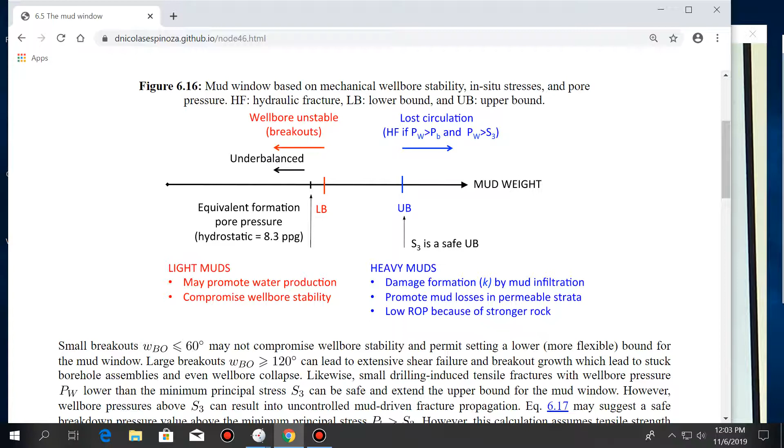So the last thing we talk about, let me bring my notes here, which are a little more organized than what I wrote, was how to define the mud window based on failure around the wellbore, either by shear when your pressure or mud weight is too low, or by a tensile fracture whenever the mud weight and mud pressure are too high.

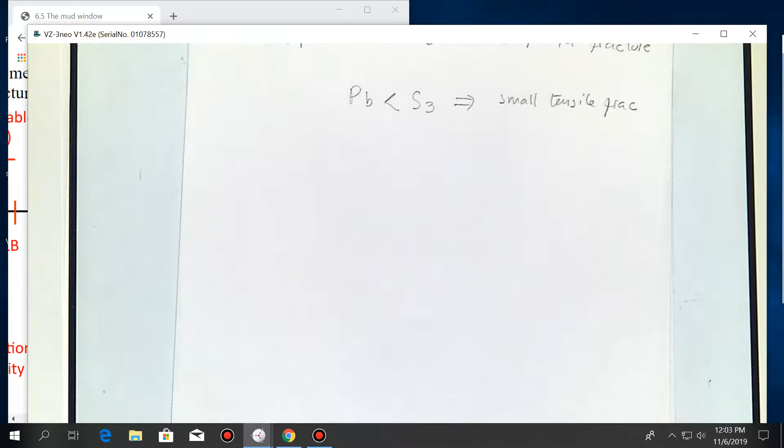The last thing we discussed was what would be the absolute maximum upper bound, or the safest upper bound, whenever you have a situation in which your calculated breakdown pressure is either smaller or larger than the minimum principal stress. I said this already last class, but very quickly, and it's very important, so I'd like to just complete this and then we'll move on.

Whenever you calculate a value of breakdown pressure which is higher than the minimum principal stress, let me move this down because we'll need this space. I'm just moving this thing down over here. And I have my eraser today, so I can erase this.

So whenever you calculate Pb larger than S3, and eventually your pressure in the wellbore gets larger than Pb, the result is that because Pw, the pressure in the wellbore, is larger than Pb, and Pb was already larger than the minimum principal stress, this is going to lead, if this is a wellbore, to a small hydraulic fracture that, as long as the pressure in the wellbore is larger than the fracturing pressure, will propagate into a large hydraulic fracture. We'll see later what the actual pressure is that you need to propagate that fracture. But if the pressure in the wellbore is larger than the minimum principal stress, there's already a chance that this fracture may propagate, and might propagate quite far away.

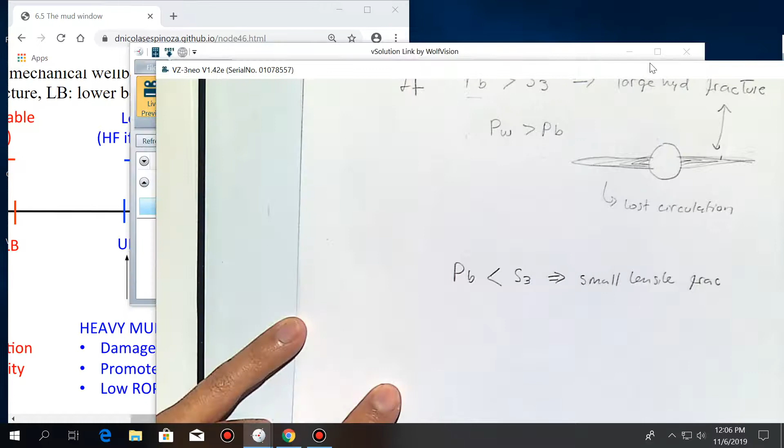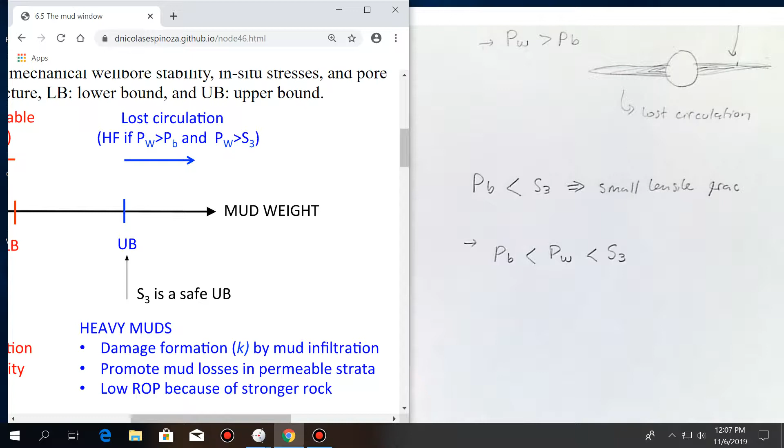However, there is a second case in which your calculated breakdown pressure is going to be smaller than the minimum principal stress. If you get the wellbore pressure to be higher than the breakdown pressure, you should have a small tensile fracture, as long as that wellbore pressure is also smaller than the minimum principal stress. Again, if you go over the minimum principal stress, you could have this large hydraulic fracture, but as long as you are in between these two bounds, for sure you will not have a large hydraulic fracture, and it will just be a short tensile fracture.

And the wellbore is going to be still stable. You're not going to have any lost circulation in that case because that's a very tiny frac. Why is it relatively small? It's because the change of stress around the wellbore, if you remember from the Kirsch equations, does not go very far away from the wellbore.

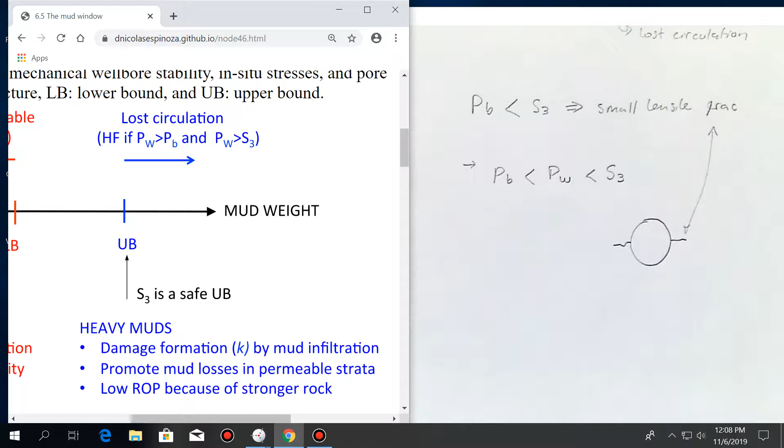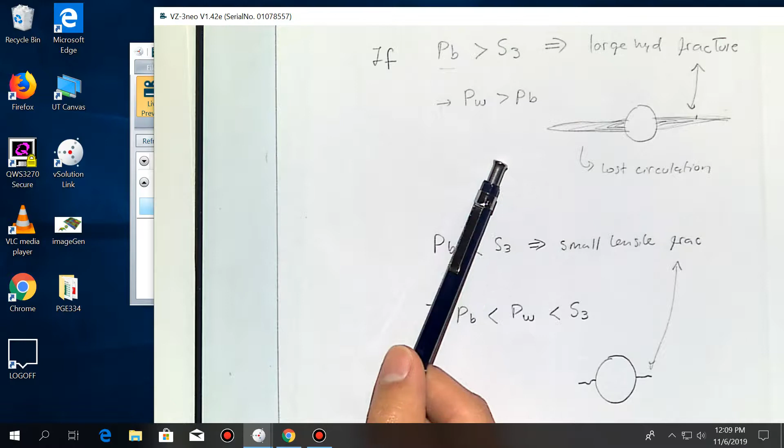So I wanted to clarify that because depending on which situation you are in, your upper bound of the maximum pressure of the wellbore could be either the minimum principal stress in this case, or in this case could be, well, if PW is larger than Pb, in this case could be Pb, and in this case could be directly the minimum principal stress.

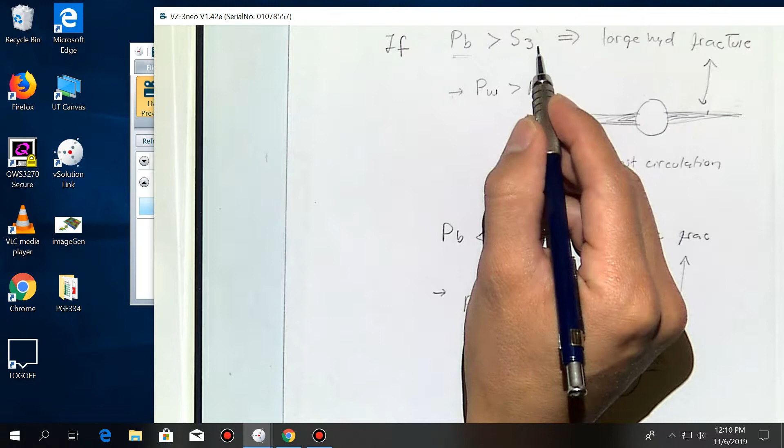As long as you don't go above the minimum principal stress, that's fine. So here you don't need to stop exactly at Pb, you can go a little bit further. But in this one, no, because if you go further, you might have lost circulation. Sometimes you could even play it safer and always set your maximum pressure as the minimum principal stress. The problem with that is that sometimes you may narrow too much, unnecessarily, what your mud window is.

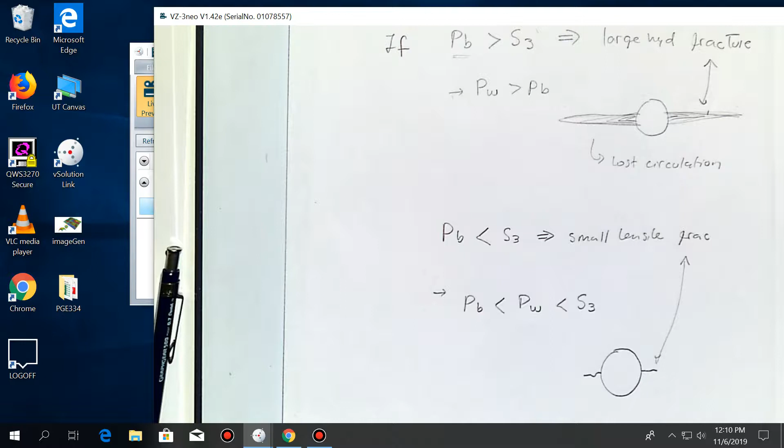All right, so with this we finish the part on vertical wellbores and the basic mechanics of wellbores, and what kind of failures you're going to have around a vertical wellbore. All the equations that we have seen, with some slight modifications, are going to work also for deviated wellbores, and particularly the equations are almost exactly the same for horizontal wellbores, whenever the vertical stress is a principal stress.

But let's talk now about deviated wellbores and how we learn. Particularly, first we'll talk about horizontal wellbores, and then we'll talk about truly deviated wellbores, in which they may not be horizontal. We'll start with an example, just to see and realize that this is exactly the same thing as what we have been seeing before.

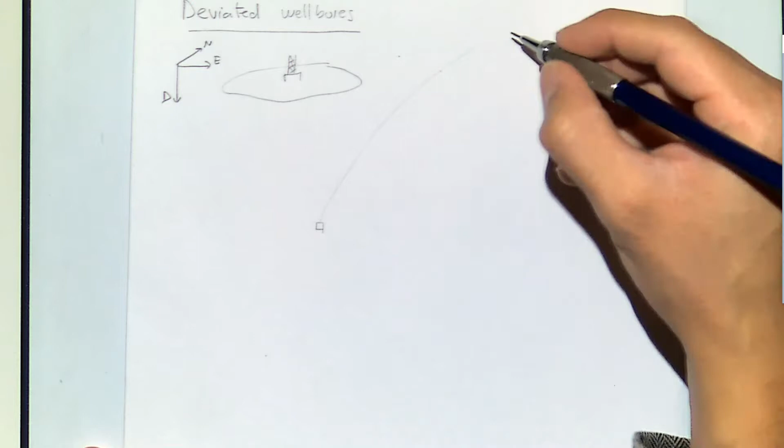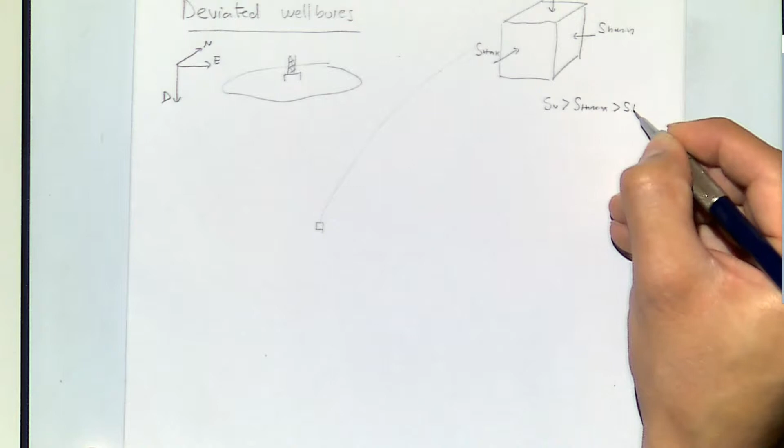Let's consider that we have a drilling pad somewhere over here, and we're going to drill horizontal wellbores. Let me add here a coordinate system. I'm going to also assume that at some location over here where we want to drill and extend our horizontal wellbores, we're going to have a state of stress which looks like this. And it's going to be normal, and this is going to be the orientation of stresses, where SV is larger than SH max, and this one is larger than SH min.

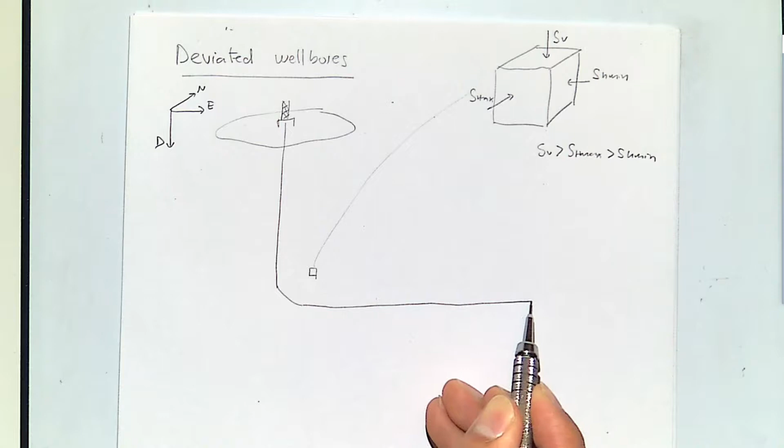Question number 1: in which direction would you drill a wellbore for multi-stage hydraulic fracturing? East direction, east or west, any direction is going to be fine. So let's drill the vertical part, and then we'll get to, let's say, the payzone somewhere over here. It deviates in this direction. Okay, I agree with that.

Let's take a look first at the vertical section. So the vertical section, somewhere around here, position number 1 — if I look at wellbore stability at this location, I should look at the wellbore which is vertical, and I'm interested in the plane perpendicular to the wellbore. So plane number 1.

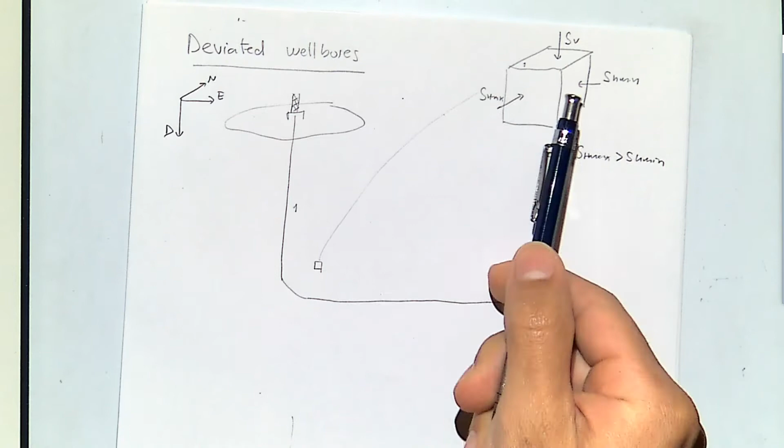For that case, in that analysis of wellbore stability, basically I'm going to be looking at the top face of this cube, and in that top face of the cube I'm going to have a wellbore, and the stresses acting on that plane are going to be SH min and SH max, perpendicular to that. Okay, which one is larger? It's obvious, SH max, right?

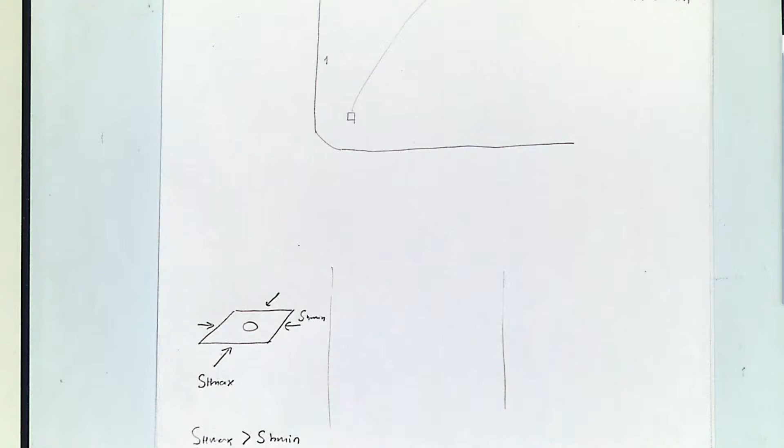Where would you expect to have breakouts in this particular vertical wellbore, in this particular location? You can tell me exactly where - now tell me east, west, or north, south. If you had breakouts, those would happen east-west. Very well, somewhere over here.

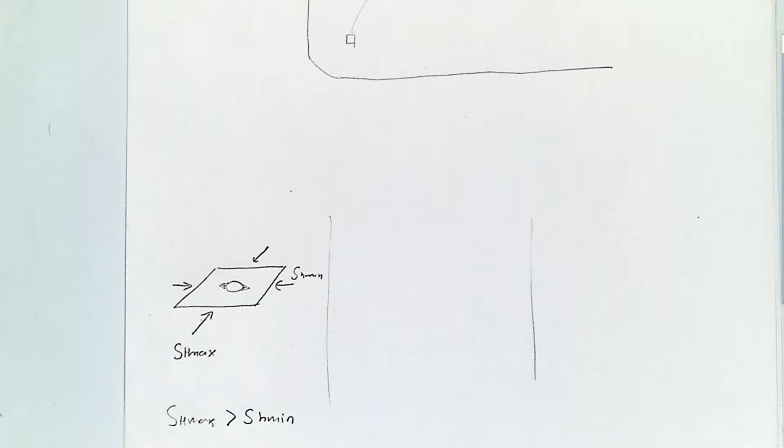And if you were to have drilling-induced tensile fractures, they would be north-south, right? But also, if we now look at them not as a line but as a plane, this would be over here. But there will also be a plane which is perpendicular to SH min - probably this one, it's getting a little difficult to see, but look at the top one. It's a plane perpendicular to SH min.

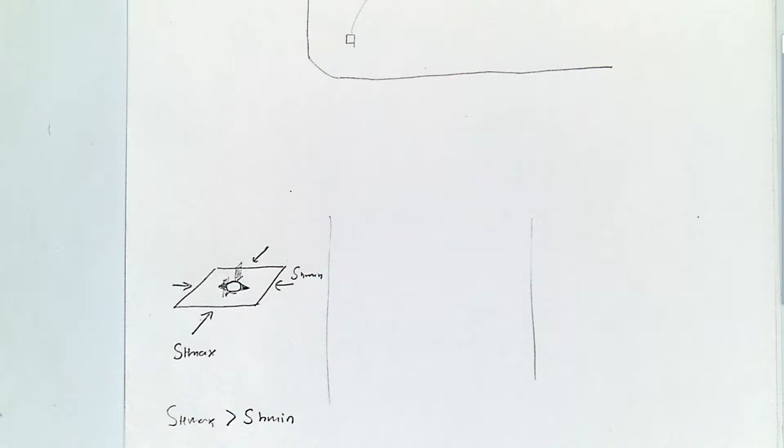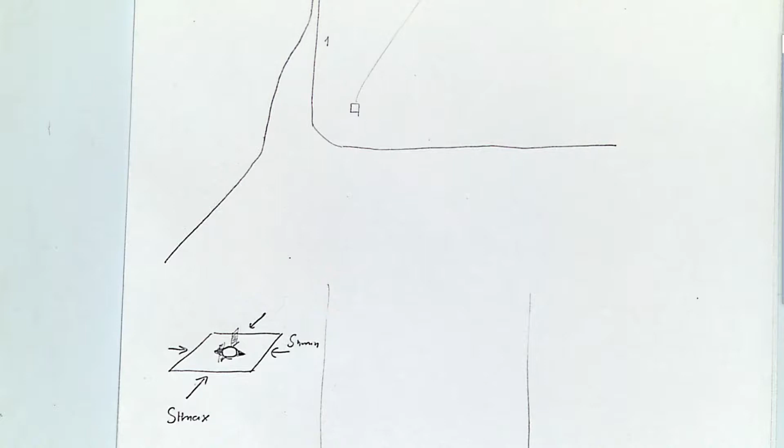All right, so vertical wellbore, we know how that works. Let's go now - this is going to be position number 1. Let me go to another wellbore. Let's say that in this case I drill another wellbore, and let me make it deviate a little bit further up. This deviates and then gets into direction north-south, and let's say that this is position number 2.

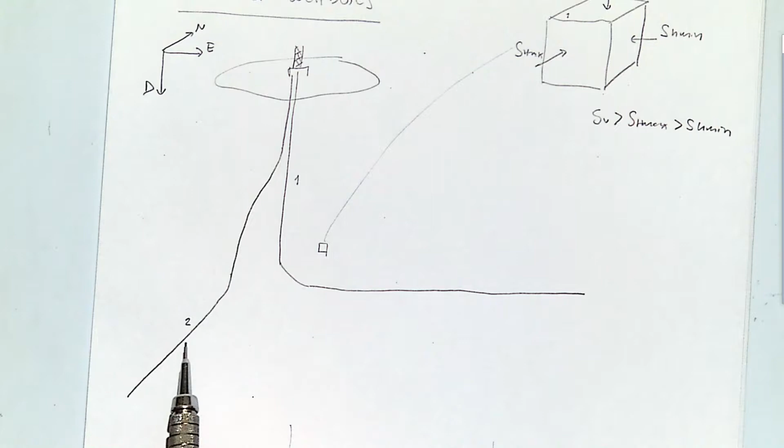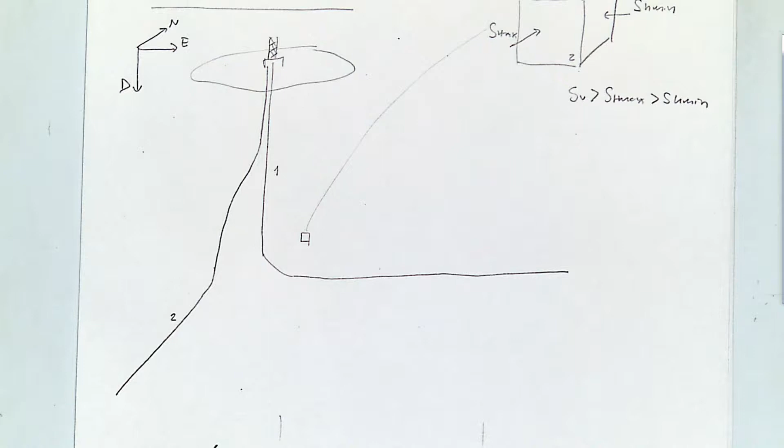If I want to analyze the stability of this lateral well in position number 2, what I have to look at is a plane perpendicular to that wellbore. That plane would be this plane, this face, number 2, that has on the plane of that stress, acting SV vertically and Shmin on the east-west direction. So this is number 1, number 2 - that's the cross-section of that wellbore, and we said that we're going to have SV and Shmin.

Notice that this is the case for this particular state of stress, for normal faulting. If you change this, it's not going to be the same. But if this is normal faulting, we know that the vertical stress is going to be higher than the minimum principal stress.

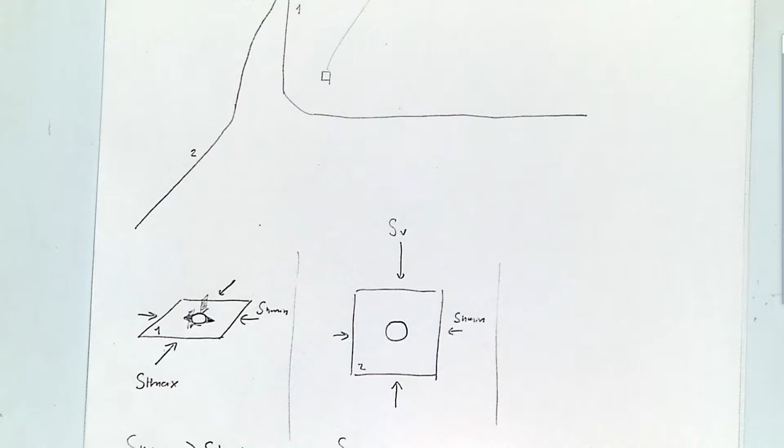Question again: where would breakouts occur if we get to shear failure? On the sides or top and bottom? On the sides, very well - because that's where the maximum compression would accumulate.

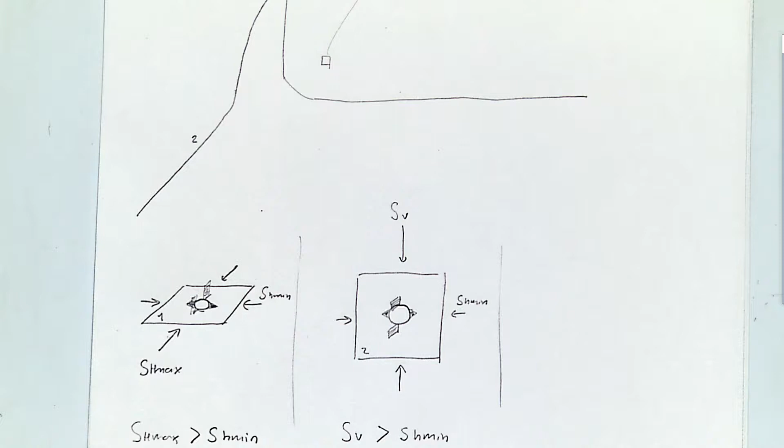And if I had tensile-induced drilling fractures, they will occur here, top and bottom, and if we look in 3 dimensions, they will be planes that again are perpendicular to Shmin. So those planes I'm meaning to draw perpendicular to Shmin, coming out from the page. This agrees with what we've already said, that a tensile fracture or a hydraulic fracture should be perpendicular to the minimum principal stress.

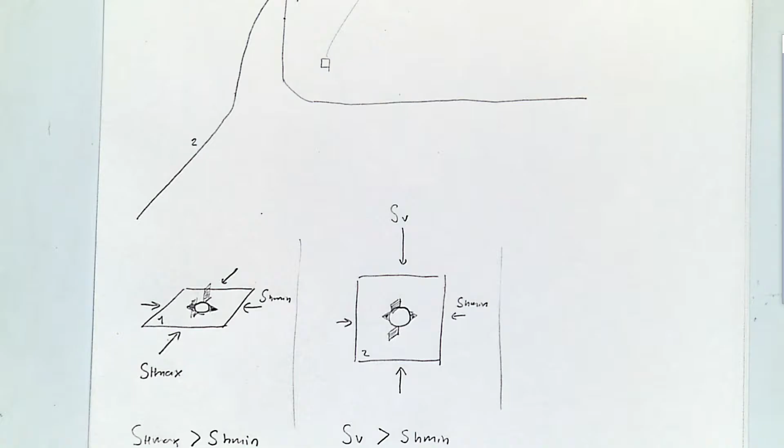And if I extend this a little further - if I had a problem here of lost circulation, I have a tensile-induced fracture, and the wellbore pressure goes over the breakdown pressure and over the minimum principal stress, we would expect this fracture to be something like this, coming out of the page, perpendicular to Shmin.

And if we had the same thing over here, if we have a small drilling-induced tensile fracture somewhere over here, and it continues growing, it's just going to grow always perpendicular to Shmin.

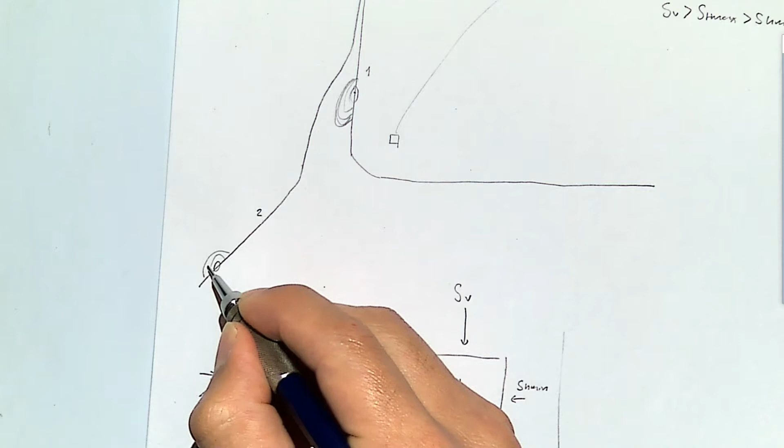Now if I extend this to a hydraulic fracture for completion, if I have two stages and I create hydraulic fractures from those, at some point those are going to link up and make a large hydraulic fracture, something like this. This is not convenient in terms of surface area, because you have multiple stages but at the end you just have one hydraulic fracture, which is not very useful - you're not taking advantage of the horizontal wellbore. That's why we go into this direction.

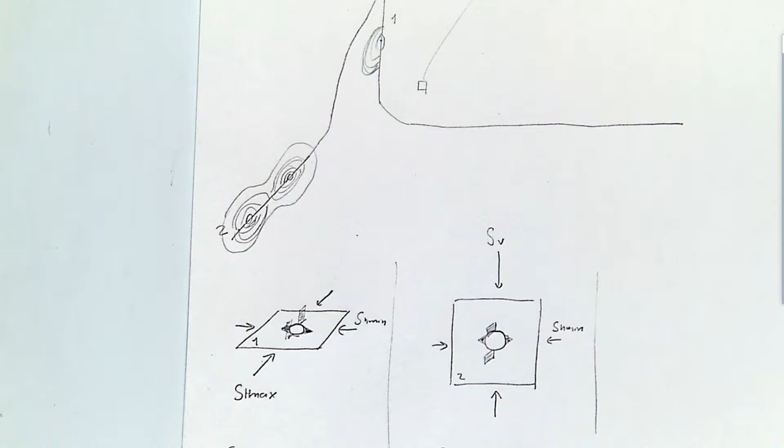Okay, so drilling-induced tensile fractures - you know where they happen in this case, and you know how they will propagate in case of a lost circulation event, or in case you're actually doing a hydraulic fracture.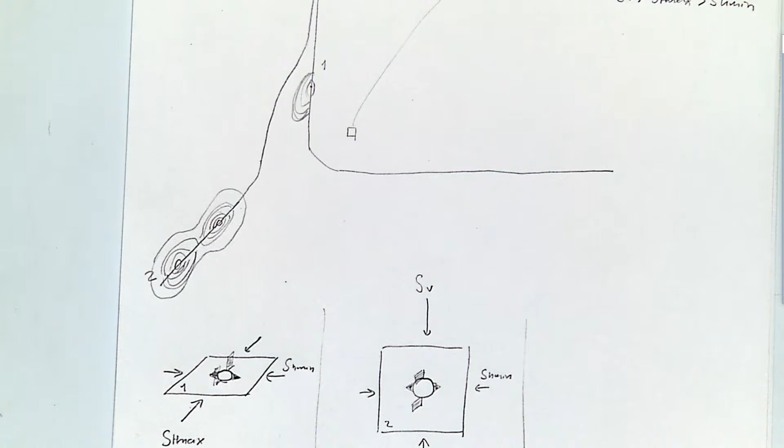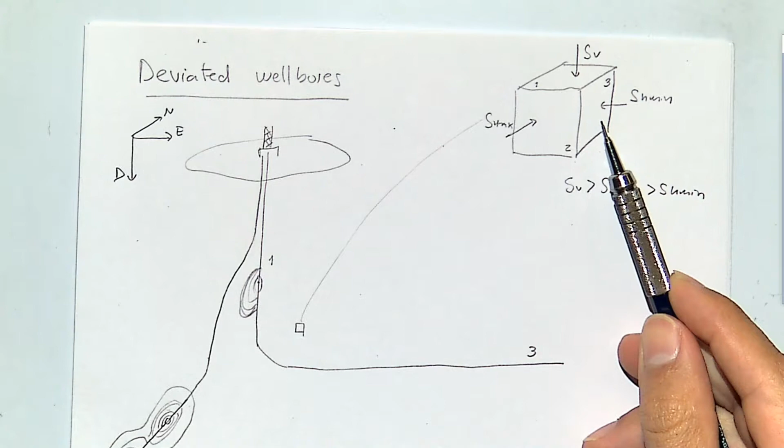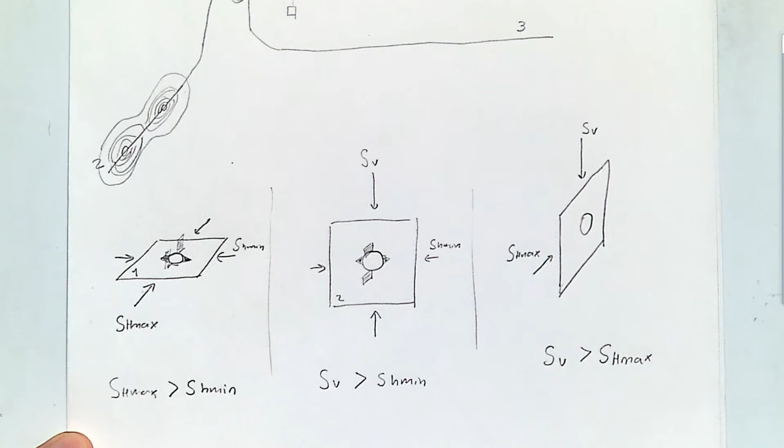Let's go to the third case, which is going to be a little more complicated. In the third case, which will be a wellbore really in this direction, we're going to have our wellbore over here. The plane of stresses that we're interested in is this one, number 3, where we have SV and now SH max in the plane perpendicular to that wellbore. So we have here SV and we have SH max. Again, because this is normal faulting, this is my condition: SV is larger than SH max. And where will breakouts happen in this particular horizontal wellbore?

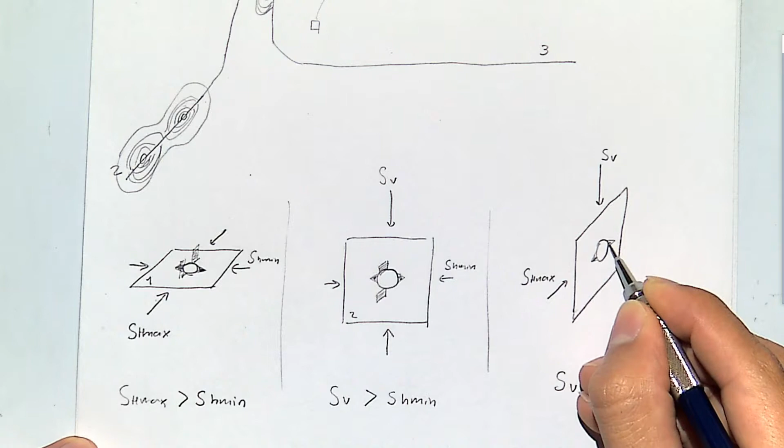All right, here is where it gets a little bit more complicated, and if you understand this, everything else is going to be a lot easier. Because we are very close to the wellbore, this can change the local state of stress around the wellbore.

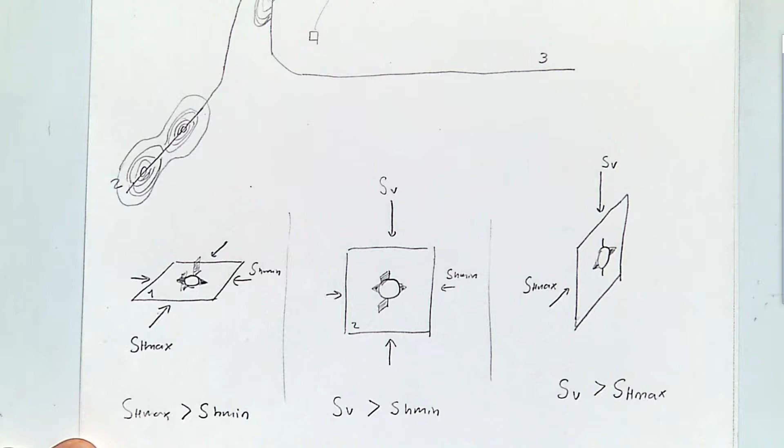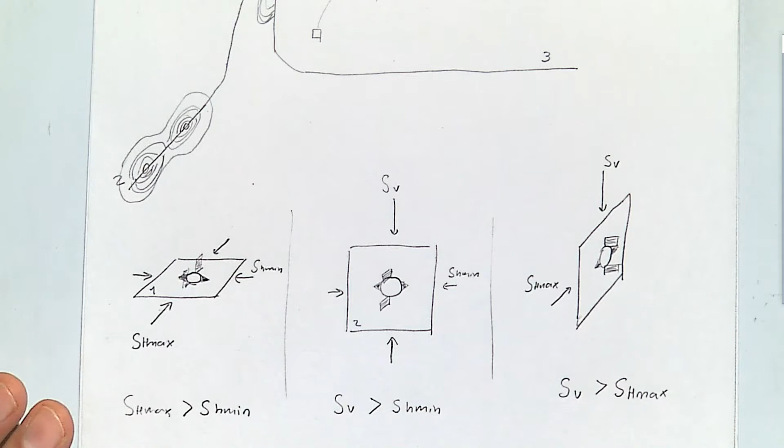That's because of the presence of the wellbore altering what the state of stress is. And because of that, very close to the wellbore, if you have this tensile fracture over here, that means that in some cases, not every case, your drilling-induced tensile fracture may form as a plane that now looks perpendicular to SH max, and you may say, well, this plane is now perpendicular to the minimum principal stress. And actually it is.

It's not perpendicular to the far field minimum principal stress, but it's perpendicular to the local minimum principal stress. Because near the wellbore now, the minimum principal stress is not in the east-west direction anymore. Now it's in the north-south direction, but just very close to the wellbore.

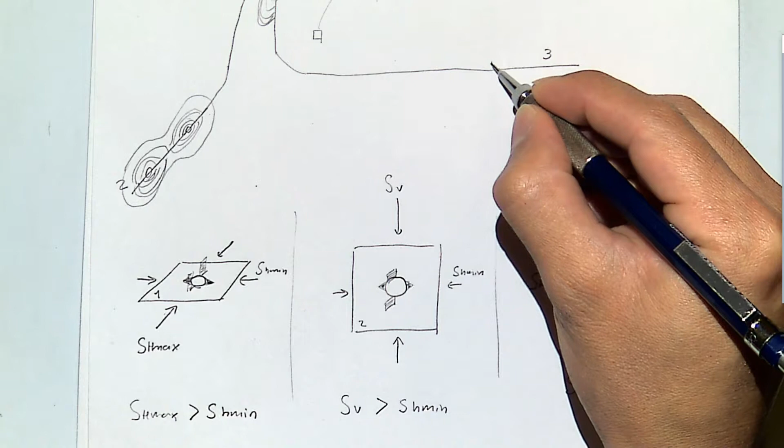And if now I get this over here, and I have these hydraulic fractures that start propagating in this direction, this is what we see in the wellbore. What's going to happen when they continue growing?

So if you remember, we said hydraulic fracture should be perpendicular to the minimum principal stress. Well, the minimum principal stress is in this direction, at least in the far field.

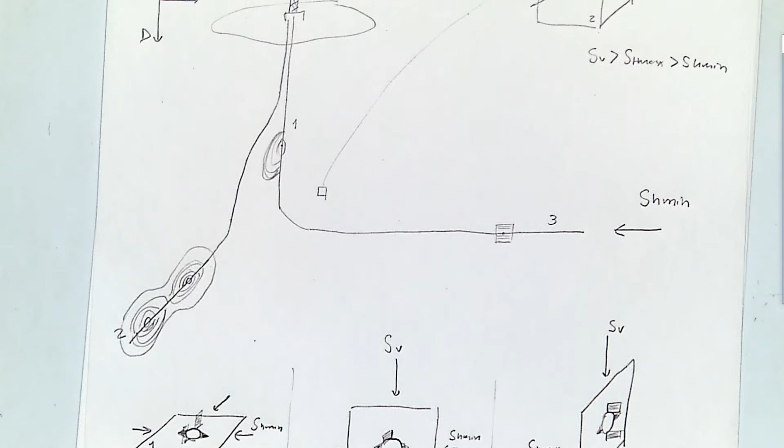So it's going to start, because of what we have seen over here, like a plane in this direction, but as you get further away from the wellbore and the effect of the wellbore is not there anymore, it's going to tend to turn into... this is a difficult drawing. Let me see if I can get it from the very beginning.

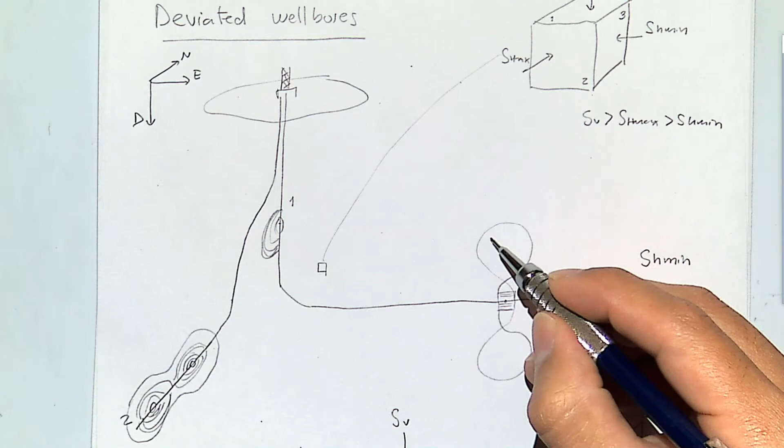Something like this, where now, okay, let me add a little bit more inclination to this.

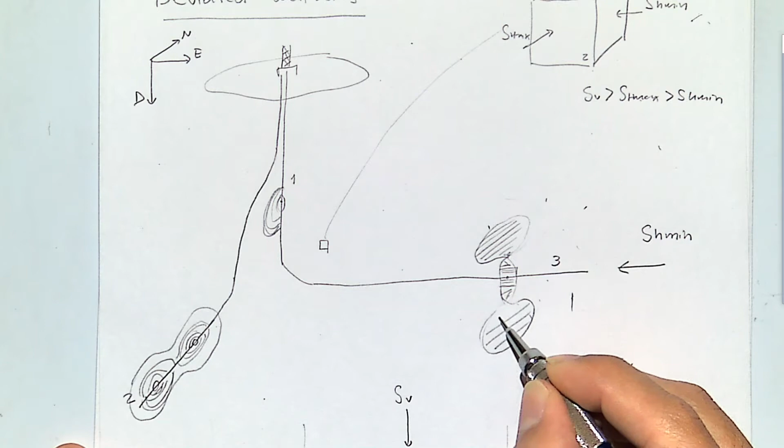I hope you can see what I'm doing here, but I'm going to explain it now on the screen. This starts like a plane, which goes in this direction, but as it goes further away, it turns and rotates and gets perpendicular to the minimum principal stress, far away from the wellbore, where the effects of the wellbore are not felt anymore.

Now the question is, in terms of drilling, this might not be too bad because you have a constriction here, and therefore the pressure in order to propagate this fracture is going to be higher than without that constriction.

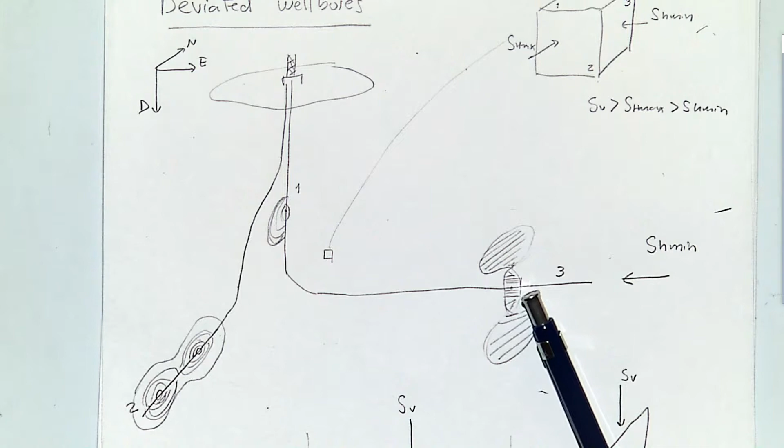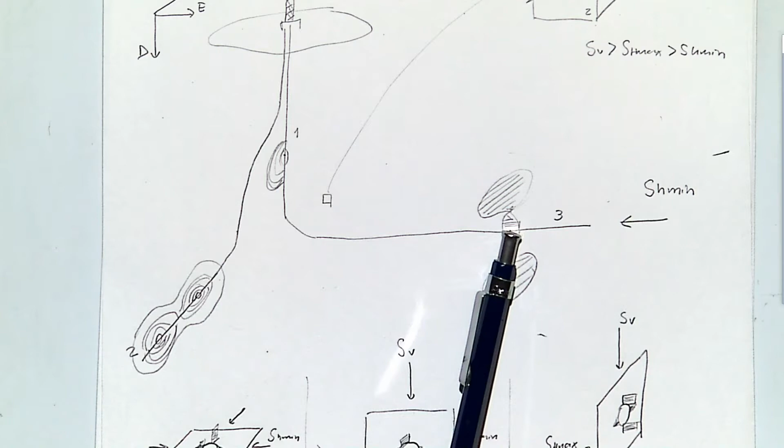But in terms of completion, would you like to have a hydraulic fracture that looks more or less like this? What would happen if you have proppant that has to go through that sort of bottleneck? Very likely it's going to screen out, and all your proppant is just not going to go into the fracture.

That's going to be a very narrow passage, and the pressures that you're going to need in order to fracture that are also going to be very high, which is not good. All right.

And this is just a very simplified geometry, but it can be a lot more complex than this, actually, with many fractures that segment into various small fractures rather than just one nicely turning.

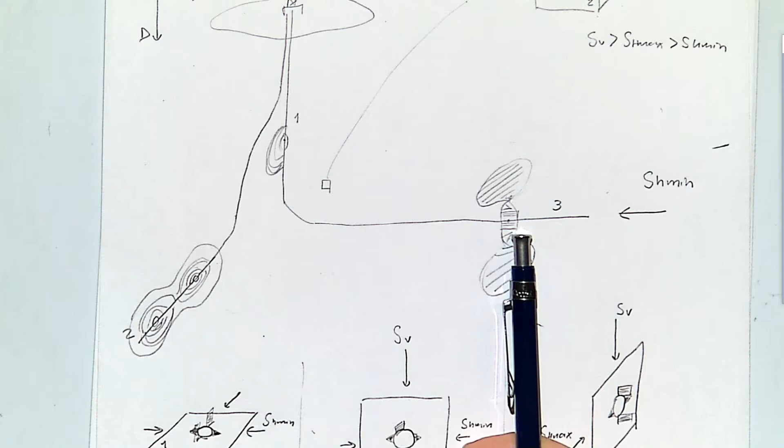What do you do in order to avoid this? Stresses near the wellbore. Some people also call this the stress cage, meaning that near the wellbore, your stresses can be so high or different that they are not the ones that you will see in the far field.

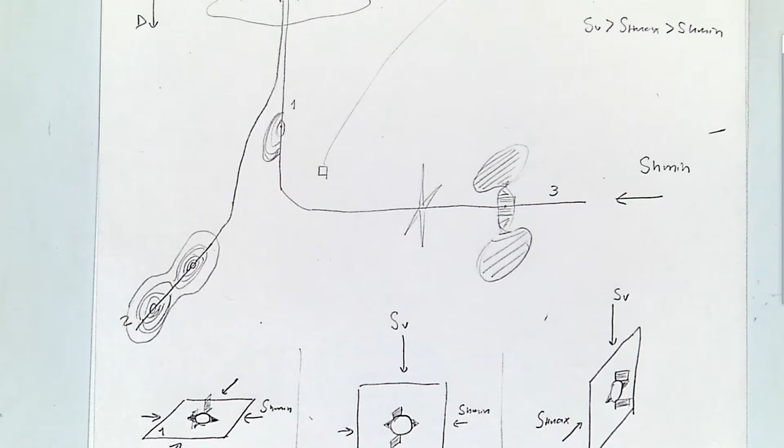You do a perforation, right? And what would be the objective of the perforation? Let's do a simple perforation here, like something like this. If you do a perforation, notice that this is going to be, a perforation is just going to be a small wellbore.

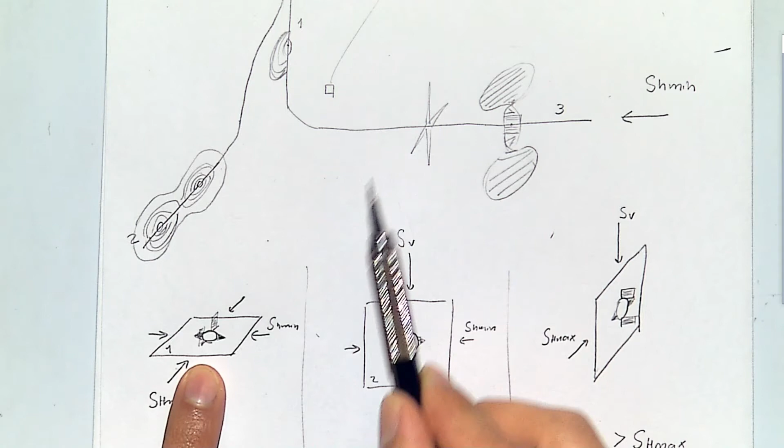With the small wellbore, looking at this one, I'm going to get perpendicular to the perforation. In a case like that, where if I have a concentration of stresses around the perforation, it's still going to be good in terms of having those fractures perpendicular to SH mean.

And if I look at that one, that's going to be the second one, which is also advantageous for propagating a hydraulic fracture out of those local concentrations of tensile stress.

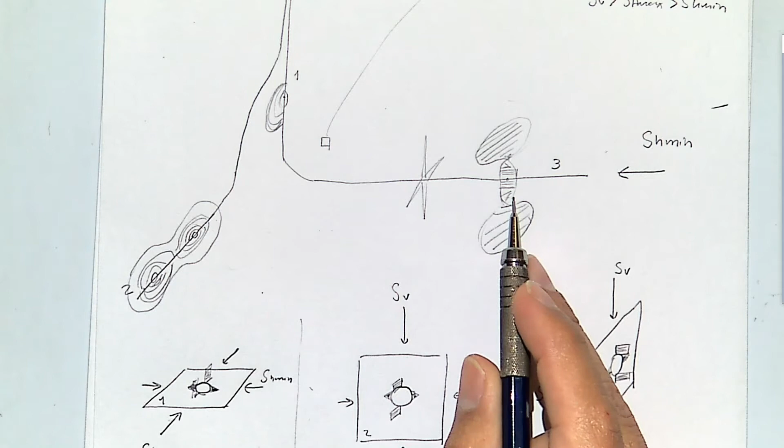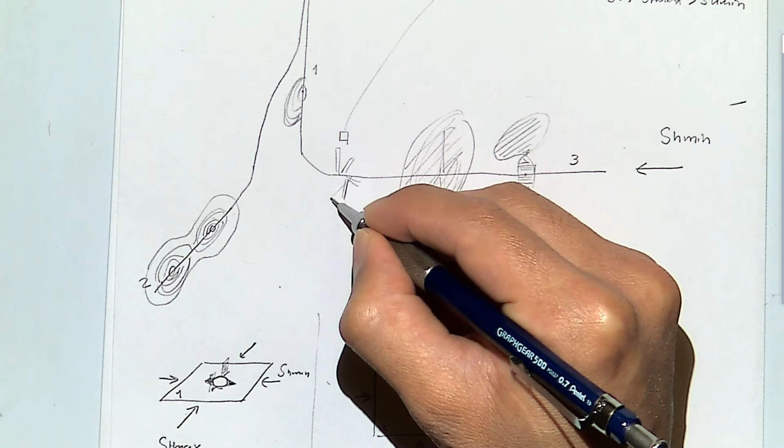Sometimes in reality, instead of doing this type of perforation, you do those at an angle advancing around the wellbore, so that you do not purposely choose what is the optimal direction, but you let the perforations find which one is the optimal.

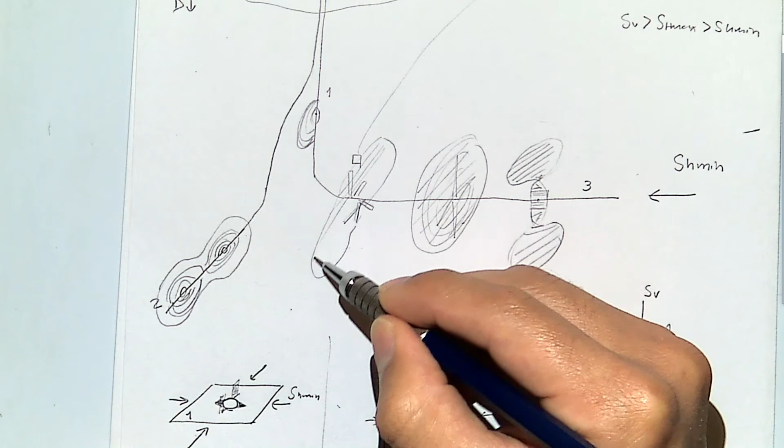In that case, you may also have a hydraulic fracture that is going to propagate as just one large plane without its bottlenecks. But again, that's going to be the effect of the near wellbore stresses.

Okay, we'll come back to completion later on, but for now, let's continue with drilling.

If you want to calculate drilling stability now for horizontal wellbores, the only thing you have to do is use the same equations, but instead of SH max, for example in this case, you will use SV. Instead of SH max and SH min, you will change this for SV and SH max.

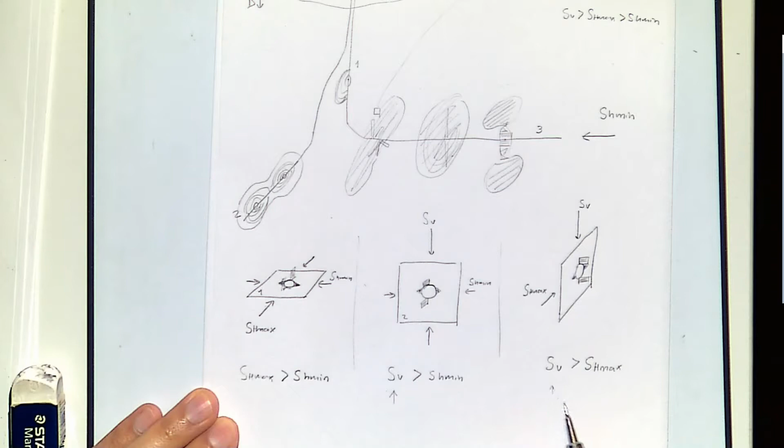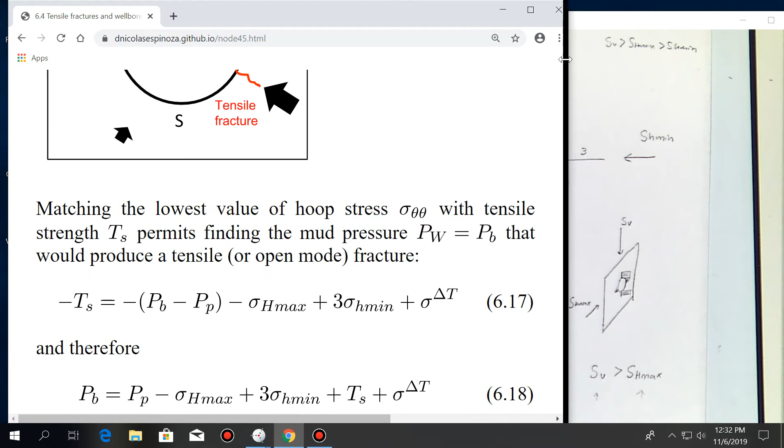Let me show specifically what I mean with this. Okay, so for example here in this equation of Pb, breakdown pressure, this one is valid for a vertical wellbore. But if we wanted to analyze, for example, this horizontal wellbore over here, instead of sigma H max, I would use sigma V. And the equation is still the same.

If I want to calculate breakdown pressure for this horizontal wellbore, instead of sigma H max and sigma H min, I'm going to use sigma V and sigma H max. But the equation is still the same.

And the same for the shear failure and the breakout angle equation. You just have to replace these stresses by the stresses that are appropriate for each case.

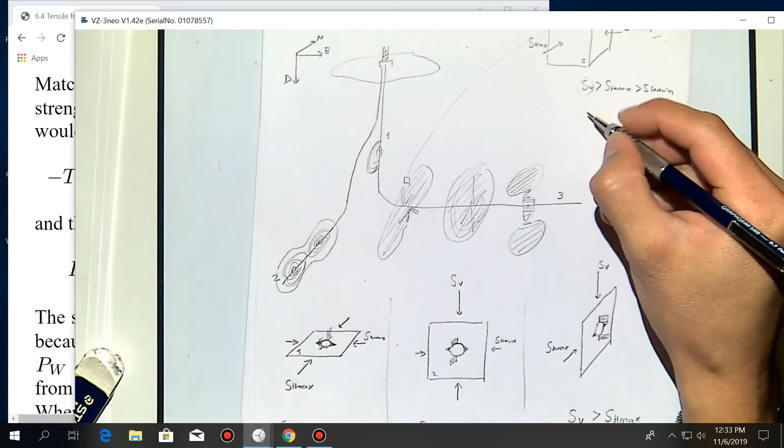Okay, so that's it about horizontal wellbores, as long as the vertical stress is a principal stress, horizontal stresses are going to be also principal stresses, and as long as your wellbore is aligned with one of those principal stresses—for example, in this case SH min, in this case SH max, and in this case SV—the only thing you have to do is replace the appropriate stress into the equations that we already saw. For the homework and for the exam, that's all you have to do.

We're not going to get into more complicated equations about how to do this for a deviated wellbore whose direction or orientation does not coincide with any of the principal stresses. We're not going to do those calculations, but we're going to see the procedure of how you will have to do that, because it's not too difficult.

It's just a lot of math involved in it, and matrix multiplication, and it's not too complex. But I like that you learn how to read some of the plots that are a result of that analysis.

All right, so the first thing we're going to have to do in order to do that is to understand and to be able to plot the direction of any deviated wellbore. And we're going to come back to the stereo net.

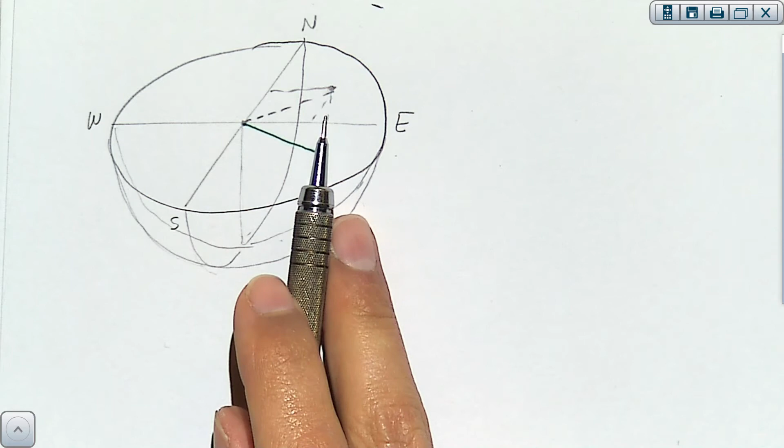The only thing we're going to have to do here is define 2 angles. The first one is the angle between the north and the projection of the wellbore on the horizontal plane. And we'll call this delta, or the azimuth of the wellbore.

So again, what we're doing here: we have a direction that goes into 3-dimensional space, the projection of that on the horizontal plane, or if you were looking at that from the top, that line - the angle is going to be on the horizontal plane, the azimuth, the angle between the north and that line.

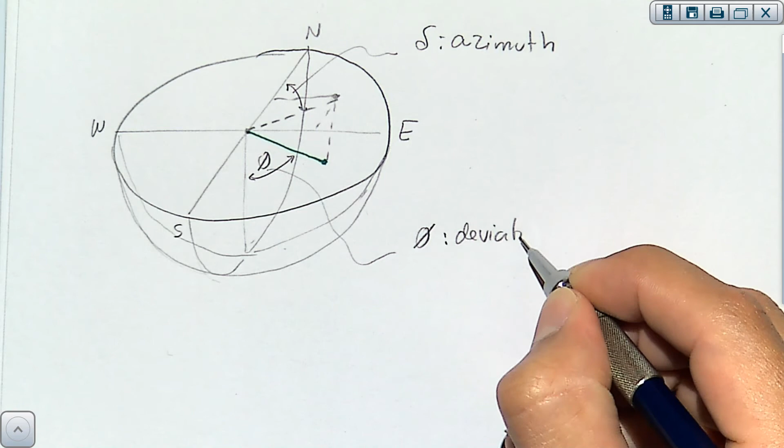And the other angle that we're going to use is just the angle between the vertical direction and the direction of the wellbore, and this is going to be phi, the deviation. So when a wellbore is vertical, deviation is 0. When a wellbore is horizontal, deviation is 90 degrees.

By doing this, we can track what is the orientation of a wellbore at any moment during the deviation survey. For example, if I have a wellbore that, let's say, starts a little bit deviated and then goes vertical.

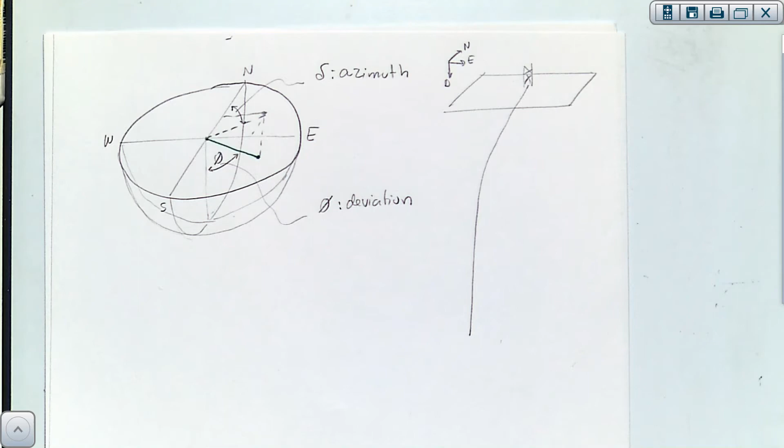Where this is north, east, depth - and it's kind of difficult to see this in 3 dimensions, but let's say that this is the vertical axis. So it starts deviated and then goes vertical.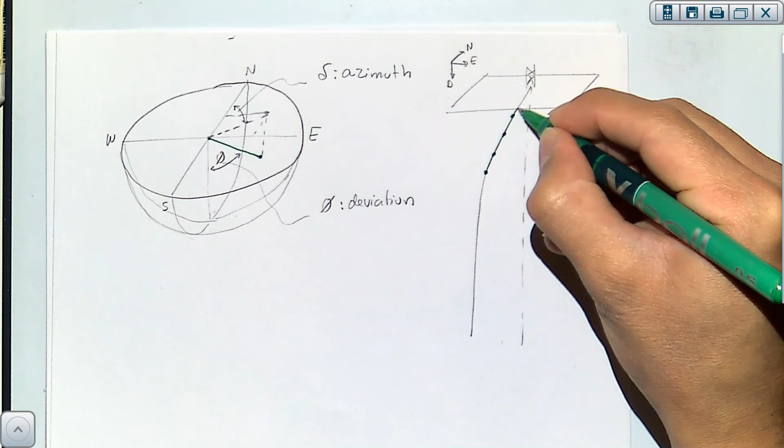I can divide this trajectory into segments, and that's what you do in a deviation survey. Each of those segments is going to tell me what is the orientation of the wellbore at that particular location.

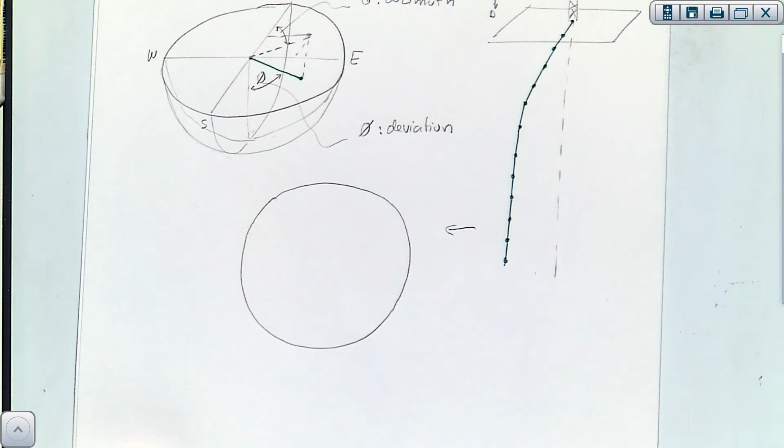For example, now when we go to this particular case - and remember this is the 3-dimensional interpretation, but usually we don't do all of this in 3D, we just take a look at this in 2 dimensions, with this thing that looks like a target.

So deviation 0 degrees is going to be at the center. Let's say this is 30, this is 60, this is 90 degrees of deviation.

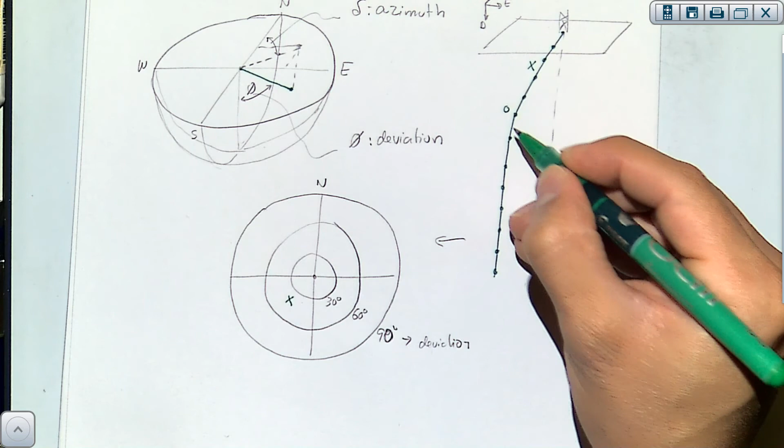So for this particular wellbore, you could start - if it starts deviated and it's going, let's say, towards the southwest, it may start somewhere over here. And as it goes, let's say this is this location. As it gets straighter, it might go over here. When you get to the bottom, it goes over there.

So the location around this stereo net is going to tell you the orientation of the wellbore. And doing this, you can plot the entire deviation survey of a wellbore. This is going to look something like what I'm going to show now.

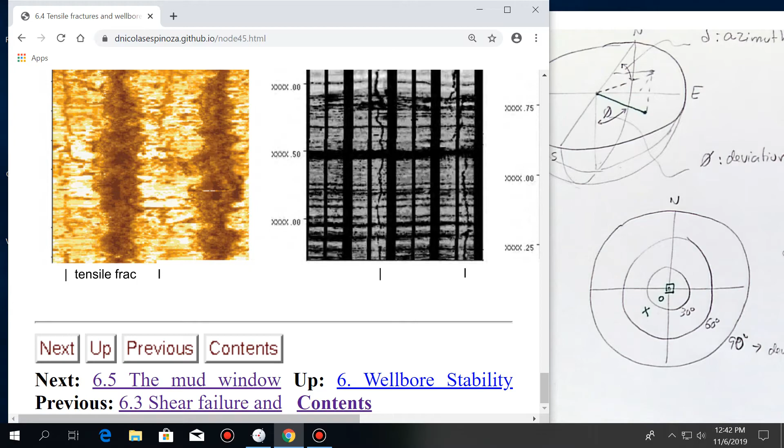It's going to look something like this, where this is the deviation survey of an actual wellbore. If you come back to homework number 1, I think I asked you to do this plot. So now if you want to do it, you can come back to that file that we used before, use the deviation survey, and make that plot.

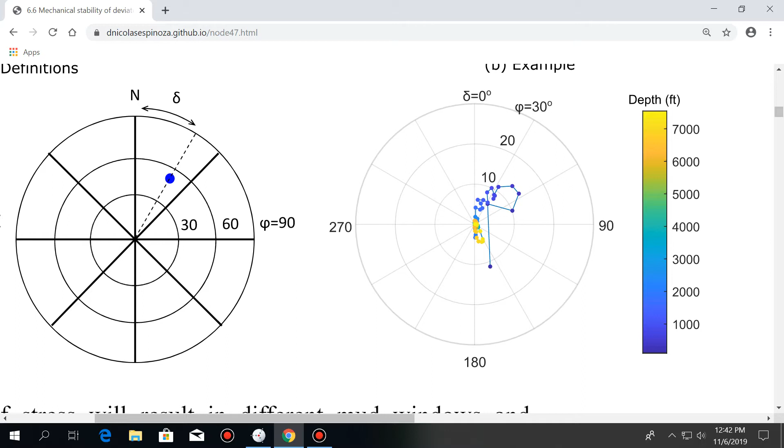All right. Can you interpret this plot? I hope you do. For extra points, can you tell me in which direction the wellbore starts? Deviation and azimuth. Anyone?

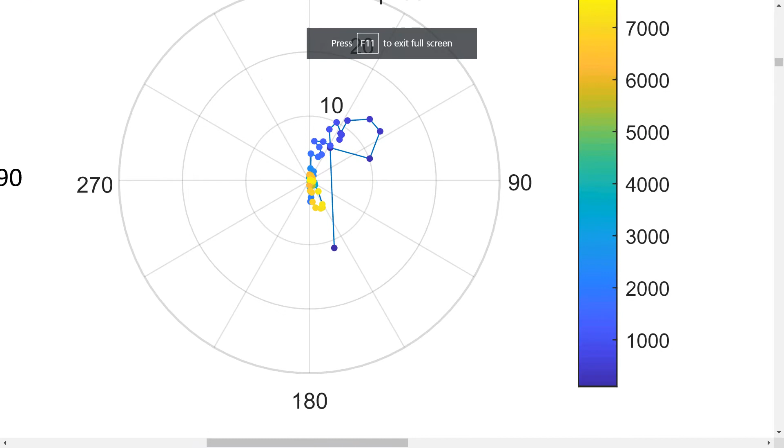What is not - oh, the circle is not clear. Let's see if I... let's see if I zoom in a little bit more. Can you see now? No? Oh, okay, okay. I don't think I'm going to be able to improve this.

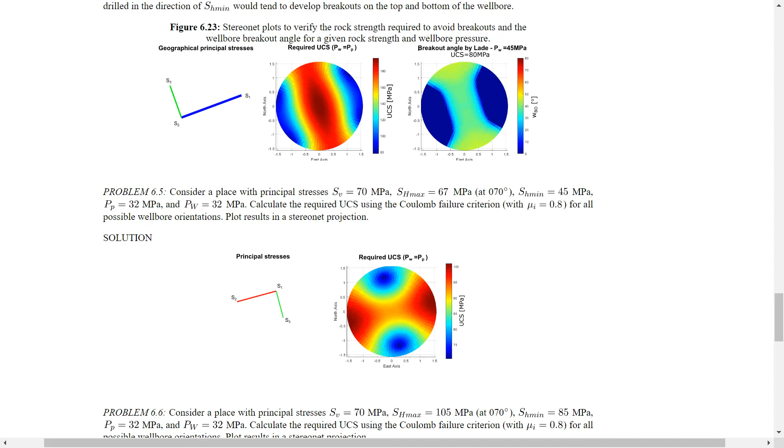Why is this useful? Because we can track what the deviation is, and according to the deviation, we're going to know whether it is close to failure or not, with plots we'll see how to make probably next class. But let me tell you, in the 5 minutes we have, what we have to do in order to calculate stresses around a deviated wellbore.

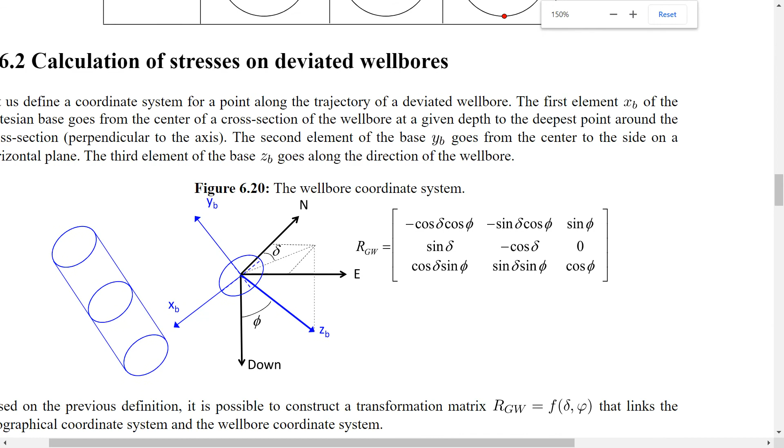The first thing you have to do if you want to calculate wellbore stability of a deviated wellbore, in which now the wellbore does not coincide with any of the principal stresses, is calculate, as we did before, stresses in a plane perpendicular to the wellbore, which in this case would be this plane, that circle.

If you want to calculate stresses on that plane, you have to make a change of coordinate system. Your new coordinate system is now the coordinate system of the wellbore, and that depends on the direction of the wellbore. In this particular convention, we take the first element as a point from the center to the bottom of the wellbore, the second from the center into the horizontal direction, and the third is directly the direction of the wellbore. That's the coordinate system of the wellbore.

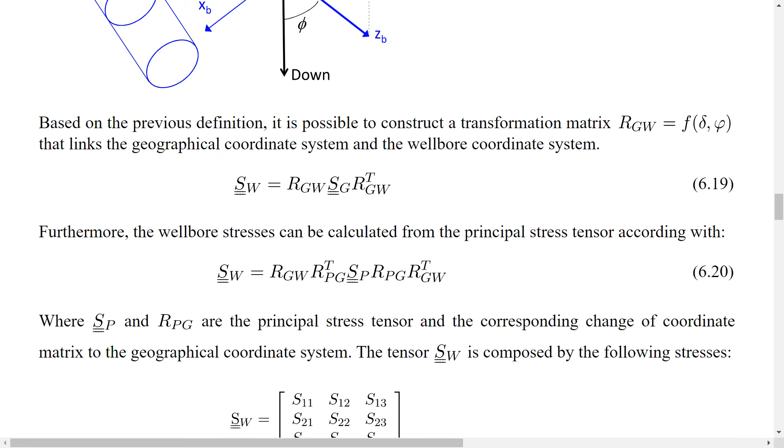You do some algebra and perform this change of coordinate system, so your far field state of stress can be changed to the direction of the wellbore. If you have this in terms of principal stresses, you can do that too, but it's just a change of coordinate system. After that, you will have a stress tensor with all elements likely different from zero.

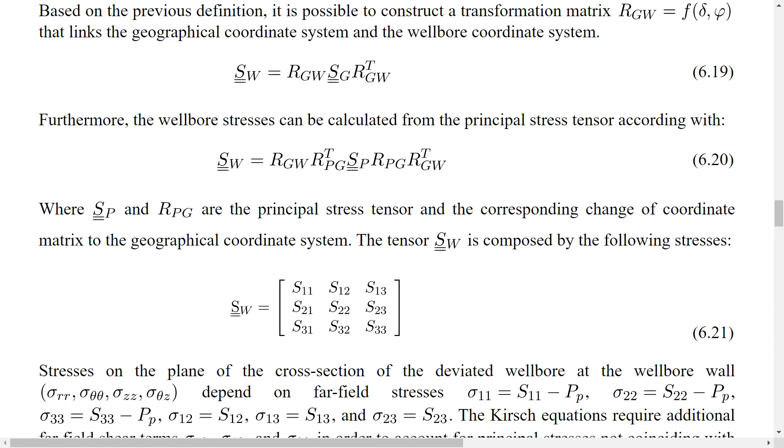With this state of stress, you need to calculate the stresses around the wall of the wellbore, same as before. In order to calculate those stresses, again you're going to have radial stress, hoop stress, but now there's a new term: a shear stress in the direction which is not on the face of the wellbore, but on the face that goes into the rock.

Let's see if I have a plot about that. But basically now you have radial stress, hoop stress, and an additional term because of shear stresses, a shear stress in the direction theta, and also in the direction of the wellbore.

Basically, with all those stresses, you have to calculate the maximum and minimum stress at the wall of the wellbore in this deviated condition, and check whether that leads to tensile failure or shear failure. It's the same as before, just a bit more complex and a longer path. At the end, you calculate stresses around the wall of the wellbore, check whether it's under tensile or shear failure, and see if that results in a drilling-induced tensile fracture or a breakout as shear failure.

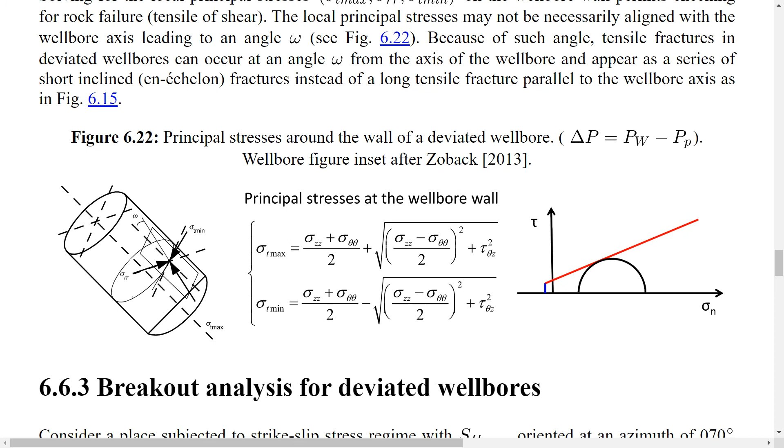For deviated wellbores, as I mentioned, we have an additional shear stress. What that shear stress does is act on the wall of the wellbore—not this one, but this shear stress—and it makes some of the principal stresses rotate around the wall of the wellbore. Instead of sometimes having a straight tensile fracture in the direction of the wellbore, you get small tensile fractures which are perpendicular to the minimum principal stress.

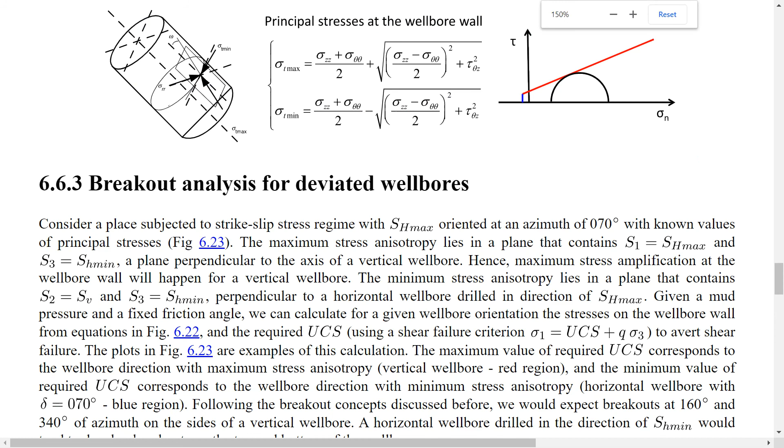For example, in this case, this one goes in this direction, so you have a tensile fracture. It's not in the direction of the axis, but distributed as small fractures along the wellbore. I don't think I have an image of those fractures, but that's basically what you do, okay?

What I'd like to talk about a little on Friday, and then we'll talk about the homework, is how you now plot those results for all deviated wellbores, all right?